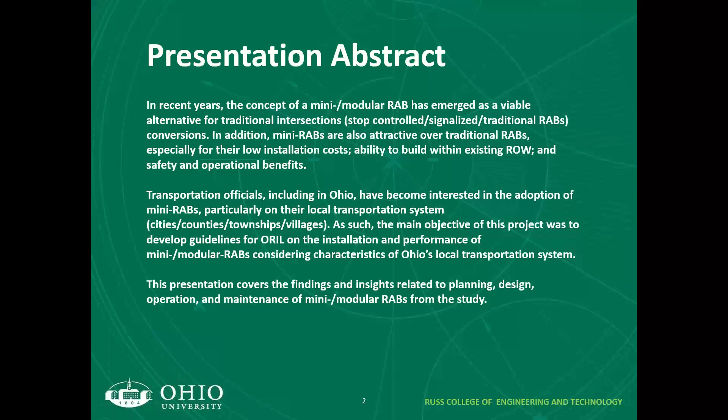So this is just an abstract of the entire project. Thanks to ODOT, they funded this through the Ohio's Research Initiative for Locals program. In this presentation, I will cover the findings and a lot of the insights related to planning, design, operation, and maintenance of mini roundabouts. Now, when I say mini, I also include the modular versions of them. The only specific difference is the material type that they use, and of course the way it's constructed, so I'll just keep using the word mini more than the modular version of it.

As I chatted about the people on the project, we had folks from Ohio University, West Virginia University, and Cal Poly Pomona, so there's 3 different institutions that worked on this project. I'd like to acknowledge the Technical Advisory Committee members for all the insights and all the guidance they gave us as we moved through this project.

Special thanks to Michelle Lucas from ODOT for managing this whole project. With all the COVID stuff and everything, she did a great job in helping us through the whole project. Thanks, Michelle. We had a couple of graduate and undergraduate students involved at different aspects of this project, and then we did a survey of transportation professionals, engineers, and other stakeholders. I'll share the results of that survey, but I'd like to thank them, and also people that participated in the driving simulator experiments that were conducted here at Ohio University.

So in terms of a background, I'm sure all of you have seen these type of statistics before. We have had 1.3 million fatalities, just road traffic crashes of all types worldwide. Here locally, we're on average about 40,000 - 38,680 traffic fatalities in the year 2021.

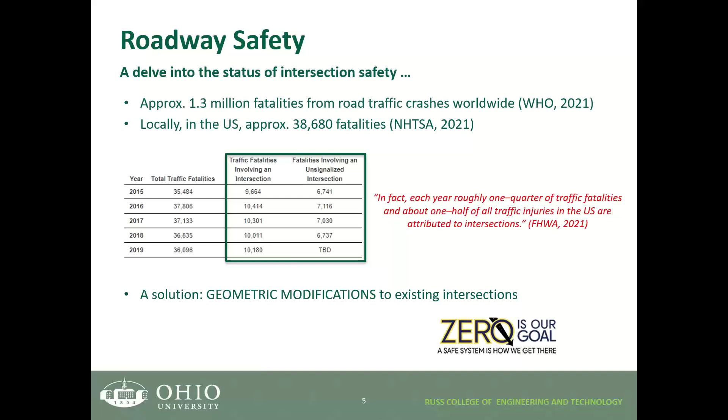So when we're talking about intersections, we're talking more of a solution in terms of geometric modifications. And when we're talking geometric modifications, we're specifically looking at converting two-way stop-controlled intersections or all-way stop-controlled intersections to modern roundabouts. And this has been the growing practice here in the US - we are moving from stop-controlled to roundabouts.

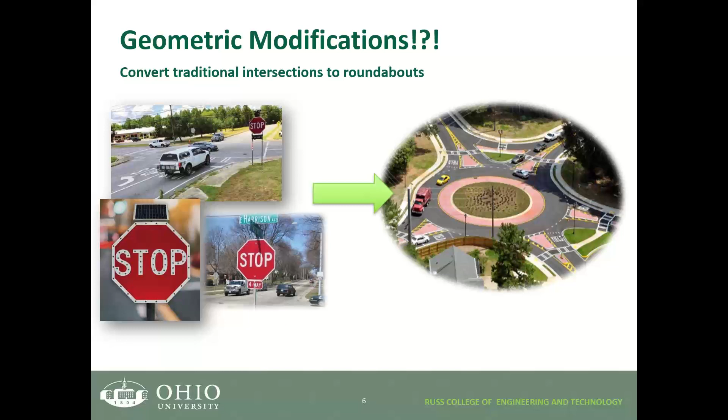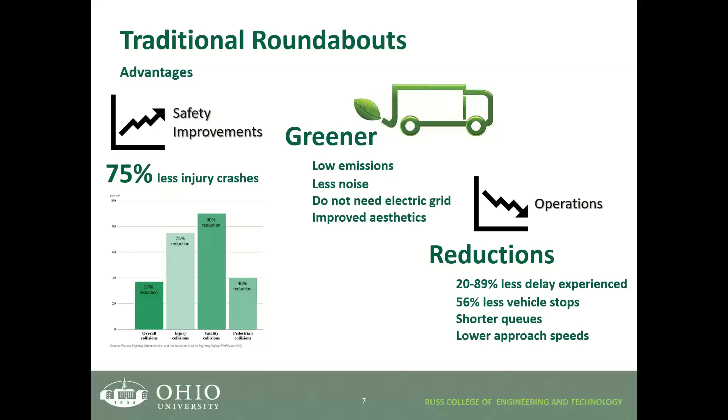I'm certain a lot of folks on this webinar today have worked on projects involving this sort of conversion. So when we talk about converting to modern roundabouts, you've all seen the good things and benefits that have been marketed with regard to roundabouts.

Safety improvements, they're greener, low emissions, low noise, we don't have backups, and in terms of operations there's less delay. In fact, because of those benefits, we've seen a rise in the adoption of modern roundabouts here in the US. From 1990 to about 2016, we had about 4,200 roundabouts installed. Today, in 2021, we're talking about 7,900 roundabouts. I'm getting these statistics from a database that Kittelson and Associates have, so I think it's inclusive of all the minis and different versions of roundabouts.

But when we talk about these modern roundabouts, we are gradually seeing what I'd call a decline in implementation, though I'd rather say people are looking at alternates. Alternates to modern roundabouts are being considered primarily because of the high initial construction costs associated with traditional roundabouts.

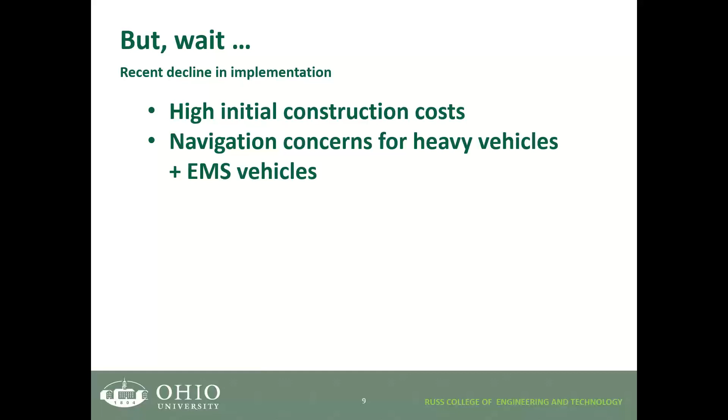They're expensive in terms of physical construction, as well as the delay in traffic. You need to shut down the intersection for the construction period, and all those costs add up to the initial construction costs. The other disadvantage of modern roundabouts is in terms of navigation. Smaller passenger vehicles can easily navigate through these roundabouts, but when it comes to heavy goods vehicles and emergency vehicles, it starts to become problematic. Here's a case example in Athens, Ohio.

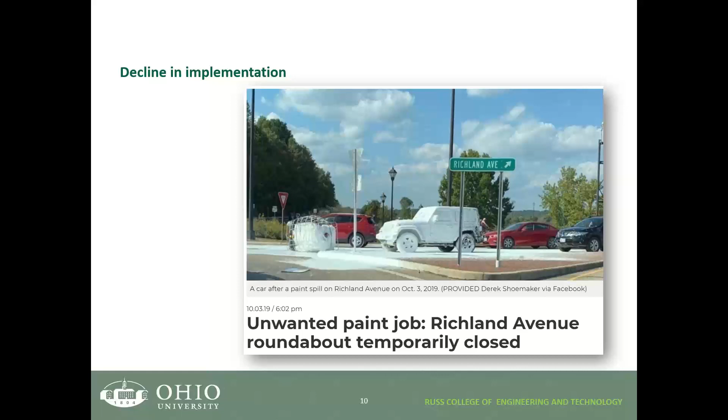We have a 2-lane roundabout where a paint truck spilled all the paint on the pavement. It caused an issue - for about 2 hours there was concern within the community. There were no alternate routes, and it was all a mess.

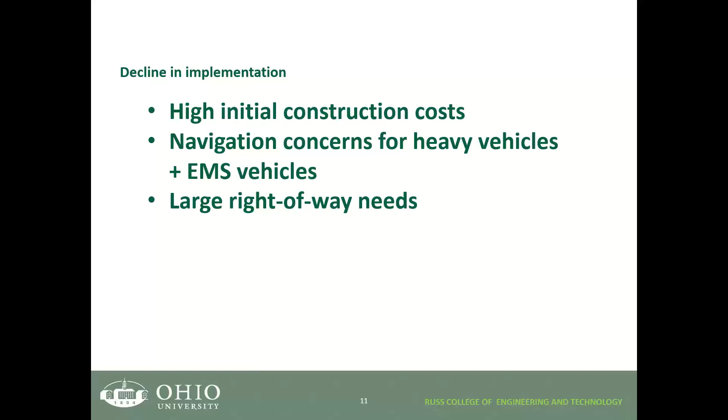In addition, with larger roundabouts, we need larger right of way, so we'll need more land in which to build the roundabout. So right of way becomes a concern there as well.

So with all these issues related to modern roundabouts, the problem exists for local transportation systems. What do we do at the county level, at the district level, at the village level, the smaller counties where budgets become an issue? With limited budgets and restricted right-of-way, one of the viable alternatives to the traditional roundabout is to use mini or modular roundabouts.

And there have been implementations out there. Some areas have started to put these minis in, but there is very limited use, and only a few studies, research studies or pilot projects have been available. Essentially, there's no comprehensive study or research report that can be used to plan, design, and implement mini roundabouts. So a lot of presentations out there, but nothing tangible that we can use for the design side.

With that in mind, ORIL thought there was a need to synthesize and summarize the current research on mini roundabouts, and more importantly, to develop a mechanism that guides local transportation officials here in Ohio on how to adopt mini roundabouts for the local Ohio transportation system.

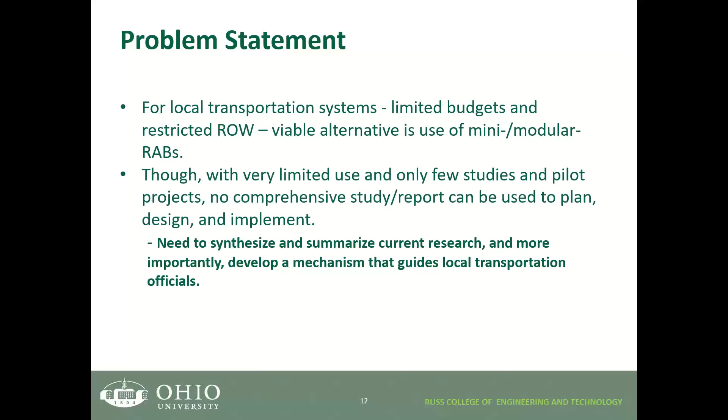Overall, the goal of the project was to develop guidelines for ORIL to use on the installation and performance of mini roundabouts, specific to the characteristics of Ohio's local transportation system.

We had some specific objectives: examine the state of practice, and develop a synthesis of current research. We wanted to investigate current practices - what are people that have already adopted or designed mini roundabouts thinking in terms of factors that relate to installation of this roundabout type?

With the idea that it is difficult for drivers to understand how to use the roundabout - what are they going to feel if they see a roundabout with a smaller circular diameter? With that in mind, we have a driving simulator here at Ohio University, and we used that to see what drivers feel with mini roundabouts.

We also conducted traffic microsimulation analysis, just to see the operations of mini roundabouts. With the first 4 objectives in mind, we decided to help the DOT here with developing specific tools - a life cycle cost analysis tool, and also a multi-criteria analysis tool, which helps with the decision making on which type of roundabout to place.

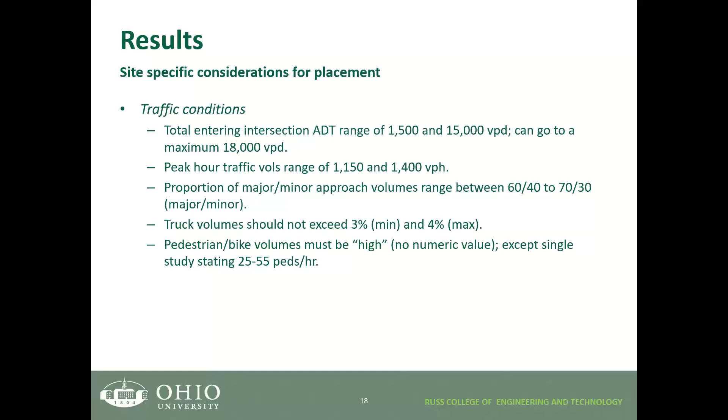When you look at roadway conditions, mini roundabouts have been implemented at intersections on minor arterials and/or collectors, with 2 lanes on the approaches—one coming in and one going out—and in very rare cases on 3-lane roadways. In terms of speed limit, we're looking at speeds in the range of 15 to 40 miles per hour along the roadway or corridor being considered for a mini roundabout.

The existing intersection control should be stop controlled, either all-way or two-way stop control. So you're basically transitioning from that stop control to the next level. Instead of jumping to a signalized intersection, you're finding something in between, which would be a roundabout.

In some cases, intersections that had been previously signalized recently had a signal warrant analysis done, and it didn't meet the signal warrant criteria. So then you're also thinking about a mini roundabout or a traditional roundabout.

When you're looking at the approaches and the intersection of these approaches, the minor and major approaches, for most applications you want them to intersect at 90 degrees, and rarely have minis been used in skewed intersections.

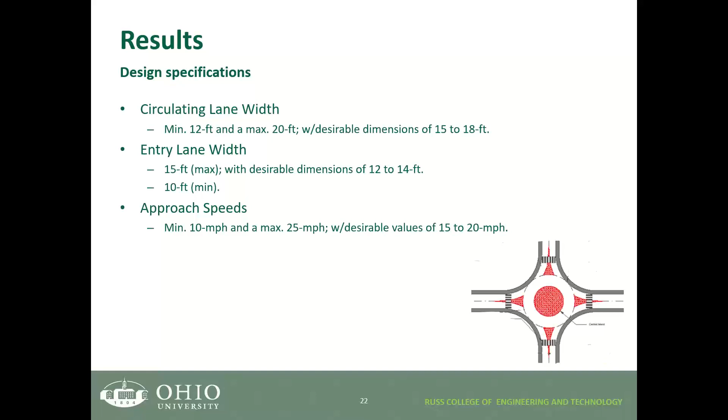Approach speeds, again, we're talking a minimum of 10 miles per hour, a maximum of 25 miles per hour. Desirable, you want to be in the 15 to 20 miles per hour range. You want to make sure the cars slow down so they are able to deflect and go around that central island.

There are design specs on the splitter island, both for the major and minor approaches. So they have different splitter island lengths, and we're talking about 200 feet maximum for the major, 150 feet for the minor. You can also have them the same. It's just depending on how you want to design it. So there's no hard and fast rules for that.

The splitter island width, you want a minimum of 6 feet and a maximum of 20 feet. Depends on how much right of way you have. The desirable was about 10 to 15 feet, okay?

And the splitter islands should be provided on all approaches to separate the opposing vehicles. You want to make sure you separate them, provide that deflective path, and also increase the conspicuity. One problem we saw even from the simulator was some drivers did not realize that they're going towards a mini roundabout.

And so you want to increase that conspicuity as they get to the circular area. Pedestrian crosswalks: the recommended width was about 8 to 10 feet, which is typical of our crosswalk widths. They're usually included within the splitter island so that pedestrians can make a transition as they cross the two lanes, and you want to include enough room for a single vehicle to wait to enter the mini roundabout.

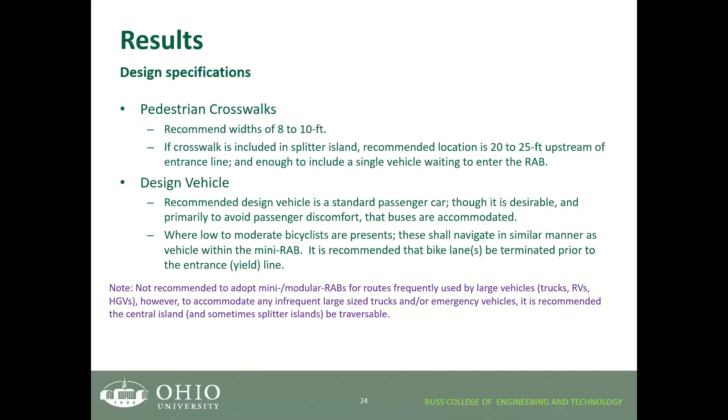When you look at the construction, most of these mini roundabouts are constructed in a similar manner as traditional roundabouts, using the same materials. You're talking about asphalt concrete and other paving materials, a composition of brickwork and things like that. So it's the same stuff.

The cost on average is about $150,000 for a mini roundabout. So very cheap construction. And then, because of their smaller footprint, there is a group of people called Vortex Engineering.

They have started to spearhead development of modular versions of a mini roundabout. Okay, so you're basically using recycled plastic materials and making pre-drilled blocks, or modular pre-cut blocks, that are being used for mini roundabouts.

So what you see here is an application in Virginia. This is good because you have shorter timelines in which you put the modular roundabout in place. They do not require any long-term work zones or anything like that.

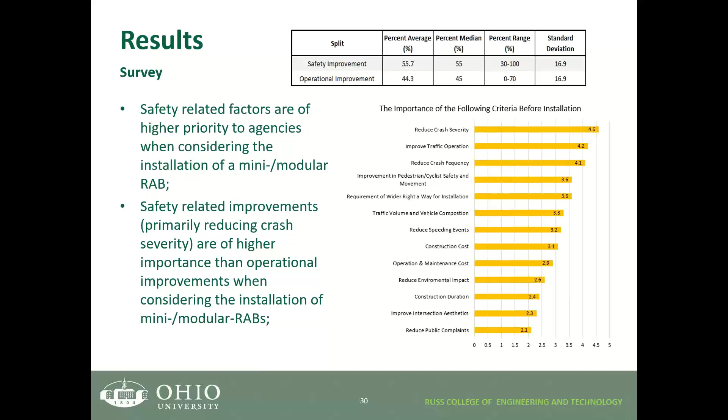In terms of where mini roundabouts have been used, respondents considered them on 2-lane highways with peak hour volumes of 1,600 to 1,800 vehicles. They reported design costs ranging from $150,000 to about $3 million, with most projects costing less than $1 million. So mini roundabouts are, of course, cheaper.

Where modular versions have been used, respondents said they're advantageous for temporary traffic control. So if you're in Florida and your signals are blown down because a hurricane is coming in, modular mini roundabouts are a good choice. If you're in Ohio and Ohio State is playing a game and you wanted to transform some intersections for good traffic flow, modular versions are a good choice for that as well.

Again, just like we saw with our survey and literature review, a lot of agencies are just using what NCHRP 672 provides as guidelines for the design of mini modular roundabouts.

The next person wanted to know about a bullet point with the letters CC, minis at isolated intersections. Say that again, what was that? They put in CC, minis at isolated intersections. I'm not sure, do you have an idea where that was? Jeff, if you can follow up with some clarification on your question, that would be great. We'll see if he submits anything else.

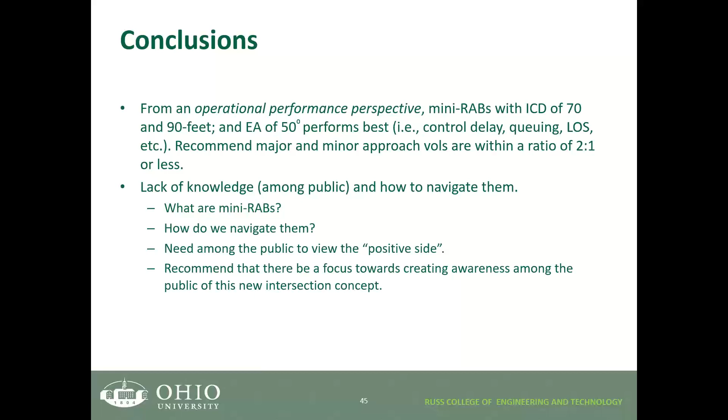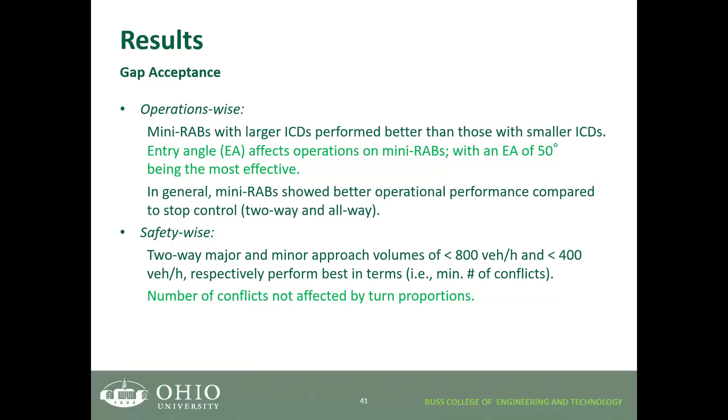He said go toward the end, I guess the end of your presentation. I'm sorry, I'm flipping through. You're fine, I'm going to see if I can find Jeff and maybe just unmute him so he can ask the question directly. Sure, give me a second. Oh, he said page. Yeah, Jeff, I'm going to unmute you, hang on. All right, found Jeff, I've unmuted you on my end. If you want to unmute yourself and ask your question through audio, that would be great, just click on the microphone icon. He said page 43, low. There you go.

Not recommended to be considered for isolated intersections. So if you're in a rural location, you don't want to consider these mini roundabouts. The reason is that in rural locations, most roadways are high speed, and there's a very good chance that drivers will not even adhere to that deflected pathway. I live in a rural area and I could understand that. So that's what we meant there. I hope, Jeff, I answered your question. Yes, he said thank you. Okay, we're good there.